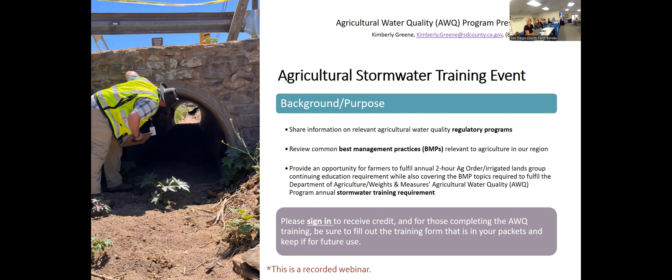Thank you, Jerry. Can you guys hear me? It's like it's on. There it goes. No? Okay. So before we talk about agriculture best management practices to protect water resources, let's go to the next slide. Oh, dear.

So before we talk about agriculture best management practices to protect water resources, I'll go over some of the basic agriculture water quality program scope and purpose. The County Agriculture Water Quality Program is responsible for ensuring that commercial agriculture sites in the unincorporated County of San Diego are implementing best management practices to prevent pollution to our waterways. We require that agriculture operations implement these practices to prevent things like irrigation runoff and other pollutants generated by agriculture activities from entering into downstream county maintained roads, culverts, and storm drains.

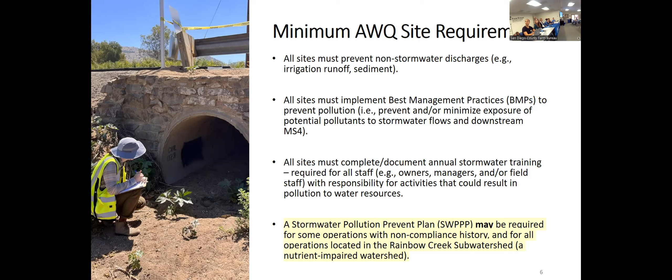As required by the MS4 permit, we follow up on every violation that we observe to ensure that the site obtains compliance. The standard required by the permit is for compliance to be achieved in 30 days or before the next rain event. Sometimes it does take longer for this to be achieved, such as if sites need to implement new or more advanced best management practices. In these cases, we document the rationale for why it's taking longer, and we work with the agriculture operations to ensure that they are provided with technical resources and other assistance to implement the best management practices that they need.

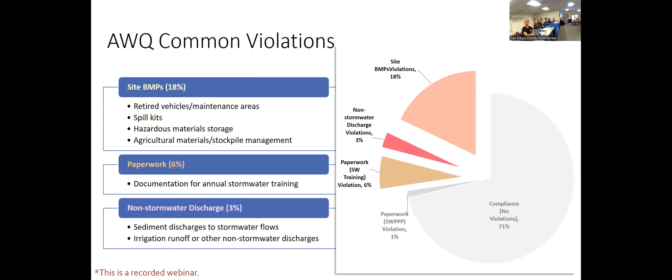For storage of retired vehicles and vehicle maintenance areas, agriculture operations need to ensure these are managed to prevent vehicle and mechanical fluids from being exposed to or mixing with stormwater. This means you'll need to store batteries and waste oil in a way that prevents exposure to stormwater, including preventing contact with rain from above and surface stormwater runoff on the ground. You'll also need to maintain farm vehicles to prevent vehicle fluids from mixing with stormwater.

This means monitoring your vehicles to identify leaks and using catch cans when needed. For retired vehicles, these should be drained or have catch cans. And for vehicle maintenance areas, we need to ensure these are managed to prevent discharge of oils and other potential pollutants to the ground and stormwater.

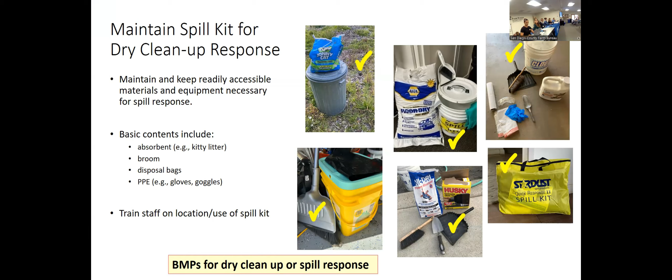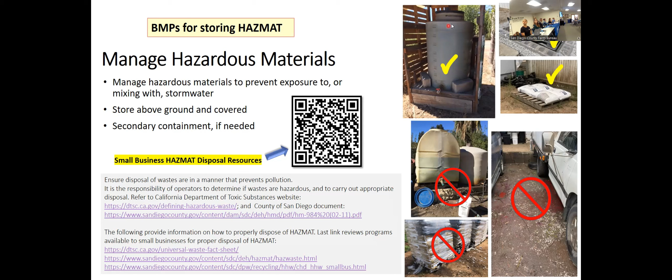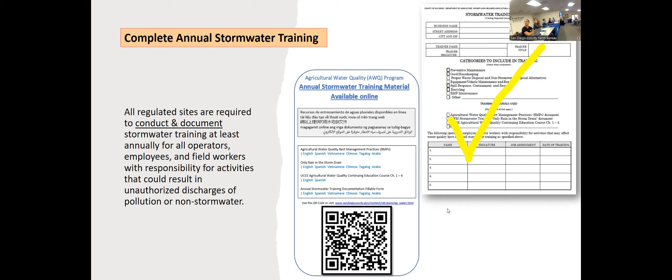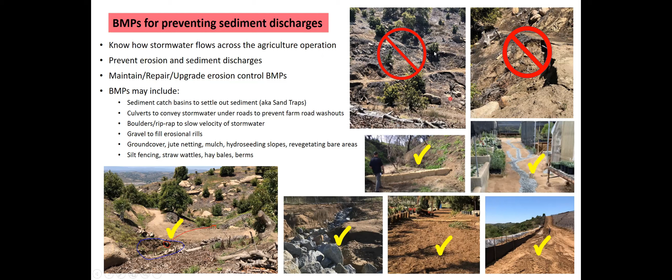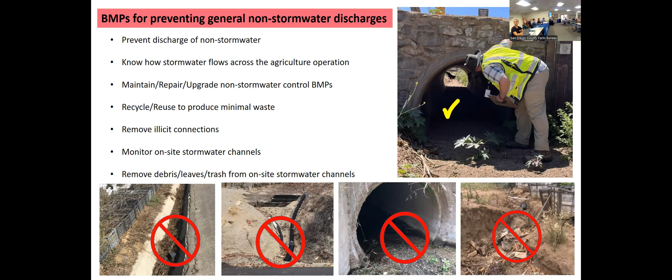Another general best management practice is to effectively use recycled materials on your property, so you have minimal waste that you would then need to manage.

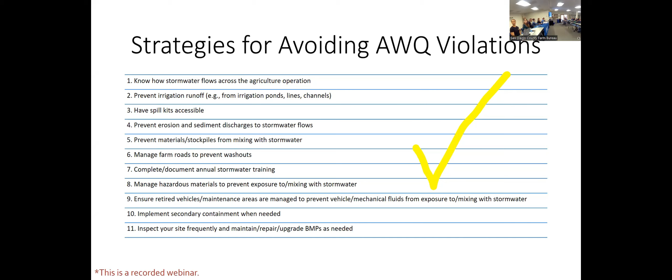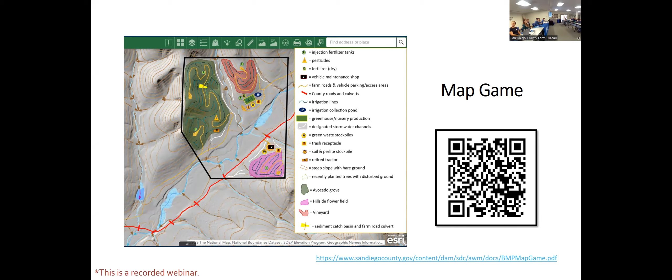Again, the farm roads are gold lines. County roads and culverts are the red lines. The irrigation lines are blue, and there is a greenhouse with a green rectangle. The stormwater channels are the white lines.

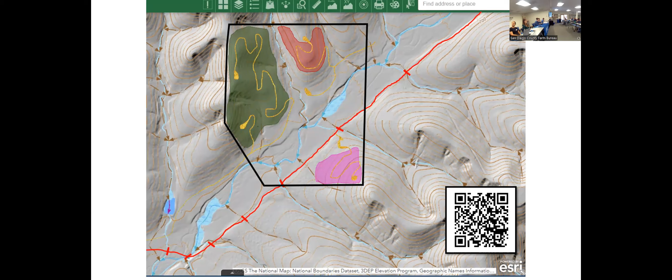The green waste stockpiles are the yellow circles with the W. The trash receptacle is the orange square with a T. Soil and perlite stockpile is the orange star with an S. There's a retired tractor identified with the orange square containing R. There's a steep slope area with bare ground identified with a brown dashed line, and a recently planted tree area with disturbed ground identified with the green dashes.

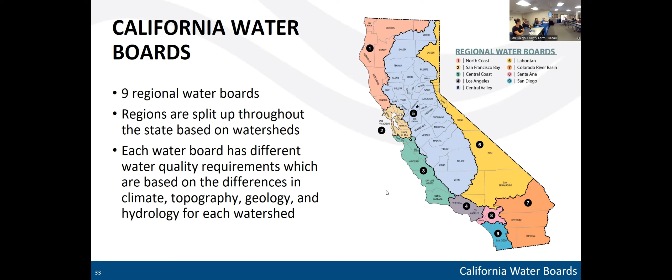Sorry, my slides are not changing right now. We don't know what it is, but something works. So we figured it out.

In our region, we have two agricultural orders right now. Order R9 2016-0004, which is the year the order was adopted, is for growers enrolled under membership of a third-party group. We're currently in the office where the San Diego Region Irrigated Lands Group is located, which is one of our third-party groups. We also have another third-party group, the Upper Santa Margarita Irrigated Lands Group, up in Riverside County.

Our other order is R9 2016-0005, for growers who decide not to join a third-party group and want to enroll as individuals. Currently in our program, we do not have any growers enrolled as individuals—100% of our growers are enrolled through their memberships with third-party groups.

We are currently in the process of renewing our ag orders. We'll be holding a series of public workshops in the future to get direct grower feedback on what you like and don't like about the orders, what you want removed or changed, so we can incorporate that feedback into the revised orders we'll be preparing. The inspection program we have should not be influenced too much by that change, however.

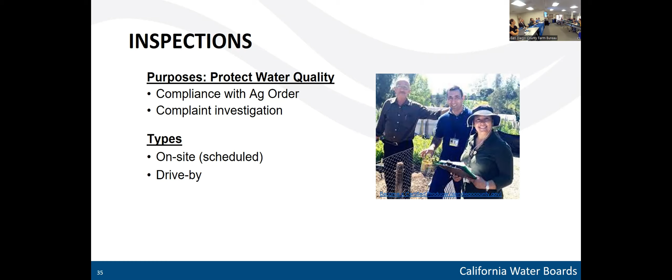One piece of feedback we've received the most is how inconvenient it is for a grower to be inspected by multiple different regulatory agencies for the same problems and situations. As a result, our office has been working hard to coordinate with other regulatory agencies to consolidate our inspections, so we can come out at the same time or very close together, knocking out inspections in one go so you're not interrupted in your day-to-day operations any more than you need to be.

Specifically, we've been working a lot with the County of San Diego's ag department, like how Kimberly put this on today. We've been going out with her and her inspectors very frequently to inspect our sites together. We have a lot of similarities in our programs in terms of what we look for. It's not exactly the same, but there is a lot of overlap. So I think it's very beneficial for everyone for us to go out at the same time and look at these same areas together, and then also look at the areas that are different, because there aren't that many, and get the inspection done at that time, then follow up based on any observations made during that inspection.

As Kimberly said, the County of San Diego's department covers the unincorporated part of the county. So we are also looking into coordinating with city programs that would go and inspect or oversee the sites in the incorporated parts of San Diego. Our program is also not limited to San Diego County. We have some ag sites in Riverside County and some in Orange County as well, so we are looking into coordinating with those counties too, so we can coordinate inspections with them.

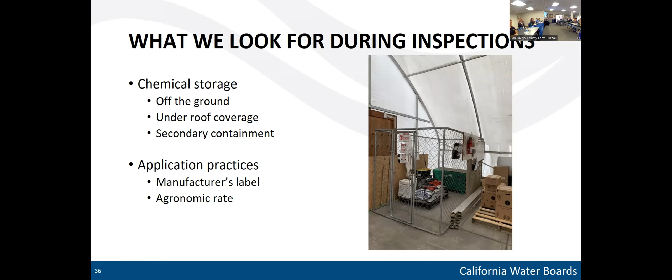Finally, we also check to see that your chemicals are applied properly. We want to make sure the chemicals are being applied according to the manufacturer's label and at the agronomic rate, so that they can't just run off from the field you're applying them to, or infiltrate down into the groundwater, or go into downstream surface water.

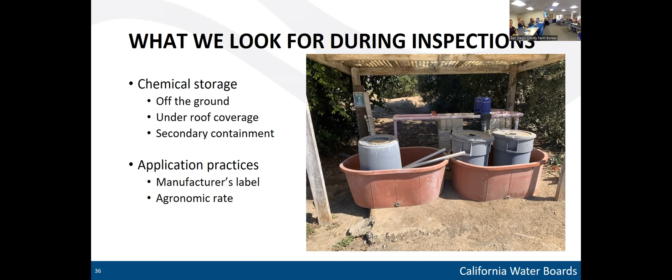Moving on from chemical storage, next I want to talk about irrigation systems. We want to check to see that the irrigation system isn't leaking.

I will ask you about what your management practices are for checking for leaks and how you respond to them, making sure they're addressed as fast as possible, which I know is important for you all because water is expensive. But for us, it's important to make sure the water isn't infiltrating into the groundwater or running off into stormwater, into downstream surface waters. This is especially important if you fertigate your irrigation water, because then that water has all of these nutrients in it that we don't want in our groundwaters and surface waters, since they can be harmful.

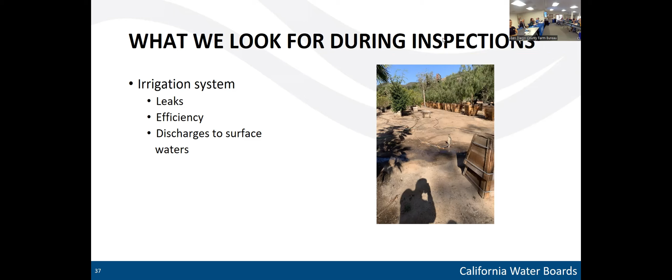We are also concerned about the efficiency of your irrigation system. We want to minimize the amount of runoff generated, to minimize the risk that it can leave your property and go into downstream surface waters or infiltrate into groundwater. So this is a picture of an ag site that has a very inefficient irrigation system and generates a lot of tailwater. As you can see, the irrigation tailwater is flowing on the site.

I do want to emphasize that it is not a violation of our order to have irrigation tailwater flowing on your site. If you are having the water flow to some sort of catchment basin, recycling system, or reservoir, something like that, that's not an issue. We're just concerned about the potential threat of discharge.

So then we would want to see what best management practices you have to minimize that threat as much as possible. Also, as Tim mentioned, we want to make sure that this water isn't mixing with stormwater flowing on your site, because while stormwater is allowed to leave, non-stormwater is not. If non-stormwater leaves your property, it is considered a discharge. So if stormwater mixes with the irrigation tailwater and then flows off your site, that mix is considered a waste, and that discharge is considered a violation.

So we want to make sure there are best management practices in place to keep the stormwater flow and the irrigation tailwater flow separate.

We also check to make sure that the irrigation system is not set up or malfunctioning in a way that causes a direct discharge to surface water.

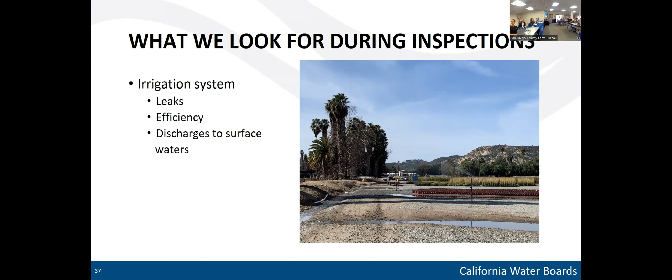Now I'm going to talk about stockpile management. We want to make sure stockpiles are managed so the material cannot easily leave that location and mix with stormwater and be carried away into a surface water body. We want a buffer zone between the stockpiles and any stormwater channels or stormwater flow, and we also want BMPs in place to hold that material there.

You can also use something else to create a berm, like gravel bags or sandbags, whatever works best to achieve the same purpose of allowing water to pass through while leaving the sediment material in place instead of letting it move.

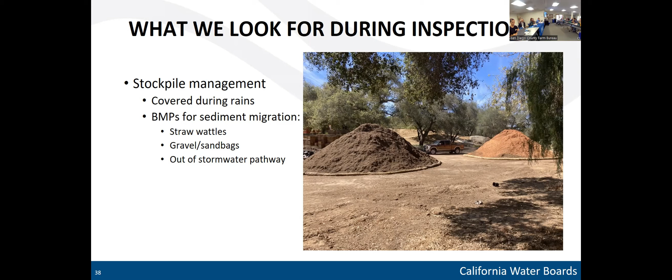As Kim said, another best management practice is to simply locate your stockpiles out of the stormwater pathway. Look around your site, notice where the stormwater flows, and keep your stockpile out of that flow path so the stormwater doesn't flow through it.

We want to make sure you have BMPs in place to prevent this type of erosion, because we don't want stormwater to pick up sediment as it flows over bare dirt on your property and carry that sediment downstream.

Large amounts of sediment in surface water can degrade aquatic life, harming the fish and plants in that stream, and we don't want to see that happen. So we want BMPs in place to prevent erosion.

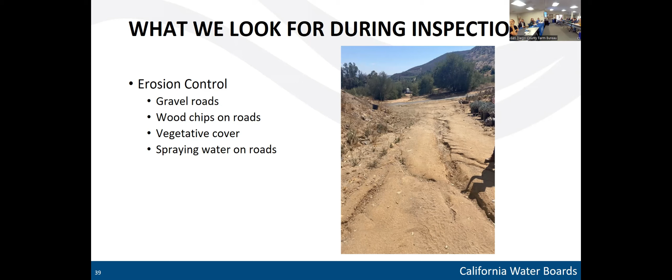This is a picture of a grower who put gravel down over his dirt roads so that as stormwater flows, it doesn't pick up the gravel because it's too heavy. It just flows down without picking up as much material, so there's less sediment to be carried away.

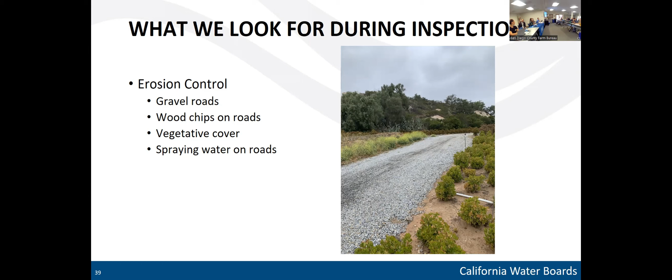If gravel isn't feasible, or paving your roads isn't feasible, you can also use wood chips or something similar to cover the roads. You can use mulch or other vegetative cover, especially on hills, to make sure the soil stays in place and isn't carried away by stormwater.

You can also spray water on the roads, like dust control, to make sure the soil stays there as well.

This ties into my next topic, sedimentation control BMPs. If it's not possible to prevent erosion, you can also put measures in place to catch the sediment before it leaves your property or goes into a storm drain system, like Kimberly was saying earlier.

This is a picture of a grower who puts sandbags around a storm drain to prevent both irrigation tailwater and sediment from flowing through and into the storm drain, which is what we like to see, because we don't want either of those going into the storm drain system.

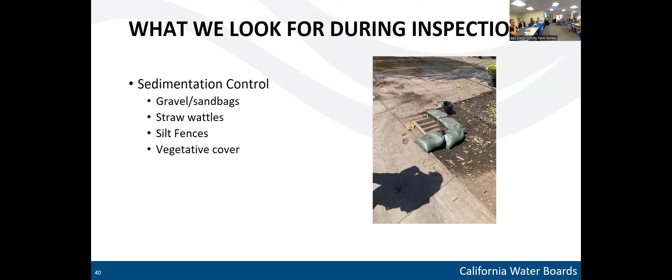You can also use straw wattles for a similar purpose. You stake the wattle into the ground, as shown in this picture, which allows water to flow through but captures the sediment.

In this picture, the pipe is capped during the dry season so no flow can go through, but it's uncapped during storm season so stormwater can flow through to the stormwater system. The straw wattle will still prevent sediment carried by that stormwater from entering the system. You can also put silt fences around the border of your property.

The previous examples were around a specific point, like a storm drain or a pipe.

Ideally, we would like to see both erosion control BMPs and sedimentation control BMPs in place, because that maximizes the effectiveness of the BMPs and ensures that the most sediment possible is either captured on your site or just not moved around at all. It's just staying in place where it should be, and that minimizes the risk of sediment getting into our downstream surface waters and harming aquatic life.

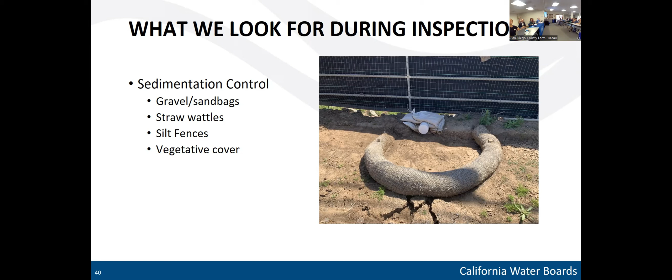We also look at your waste management, so we want to make sure that there isn't trash just littered around the property. It's being picked up and properly stored in a waste container that is lifted up off the ground, has a lid so that it's not in the way of the stormwater flow path, and stormwater is not being introduced and then leaching out of your container and flowing into downstream surface water or infiltrating into groundwater, because we don't want any of the pollutants that may be in that trash getting into our water bodies.

We also want to make sure that trash isn't directly in a stormwater channel, which is the case in this picture. This is some trash that's in a stormwater channel that connects to a creek and discharges directly into it. Our concern here is that when it rains, the stormwater can pick up the trash and anything that's on it and carry it directly to that creek. So we want to make sure this trash is cleaned up and properly disposed of.

When we talk about waste, we also talk about the restroom or bathroom facilities that you have on your operation. Most of the time I see porta potties. I don't really see too many operations that have a different kind of bathroom facility, so I'm going to talk specifically about porta potties.

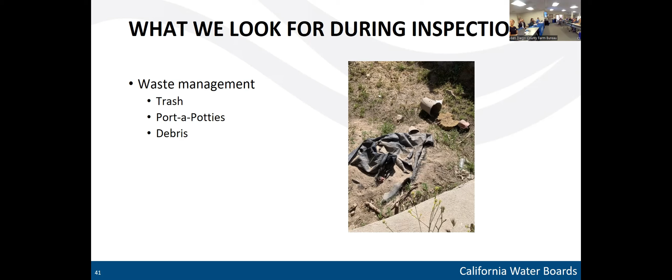We want to make sure that your porta potties have secondary containment, which in this picture is this black tub at the bottom of the porta potties. That way, if there is a leak or a spill or something, the waste in those porta potties goes into this black tub instead of discharging onto the ground and potentially getting into groundwater or flowing with stormwater off into a downstream surface water body.

I also ask during my inspections how often the porta potties are serviced, because I want to make sure that the amount of waste in those porta potties isn't going to overwhelm the secondary containment measure. In that case, the secondary containment is kind of useless if the waste is just going to overflow anyway. So we want to make sure they're being serviced in a timely manner.

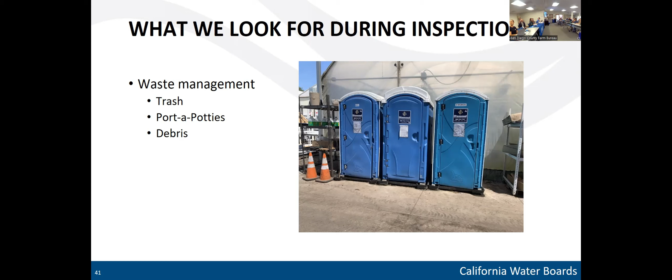We also look at any other kind of debris that may be on your property. This could be drip lines that have torn, or any kind of irrigation line that is torn, or tarps, or just anything else that could be on your property that is waste but maybe doesn't fit in a trash can, or doesn't go to the same kind of landfill that regular trash does. So you're just storing it separately.

It's totally fine to have piles of debris for removal on your property, but we just want to make sure it is organized and out of the way, so that stormwater is not going to flow through it and pick up any of the chemicals that may be on that debris. You want to make sure the debris is going to be removed in a timely manner and not just sit there for a long time. So these are the kinds of things that we look for in waste management.

So I went over some of the big things we look at during inspections. I know some of them were reminiscent of what Kim was talking about, but there's a lot of overlap between our programs. Now that I've covered that, I also want to go over some of the violations I've seen. Since the mission of our water board is to protect the health of our water bodies, the biggest violation is a discharge of waste into the water bodies, because that's directly against our mission.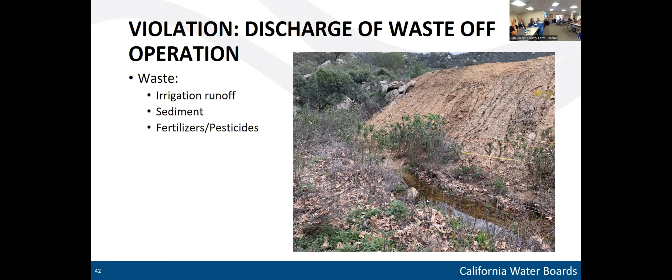Even though this isn't a discharge directly into a water body, our order prohibits discharge of waste off of your operation. So just leaving your operation and going onto another operation is considered a discharge, because it's not the responsibility of the lower operation to manage your waste. Because of that, this waste can flow off their property and get into a downstream surface water, or infiltrate into the groundwater. It's still your waste, so it's still your responsibility, it's your violation.

This irrigation water runoff would contain fertilizers, pesticides, or other chemicals, which is what constitutes a waste.

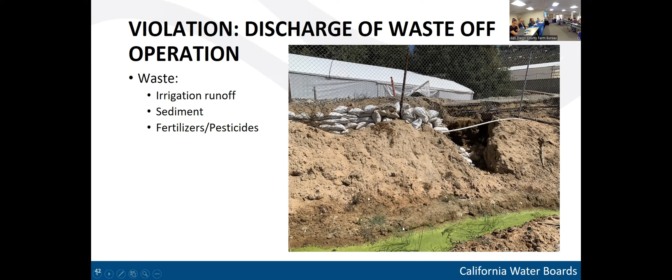Now that I've gone over the violations, I want to talk about what we would do if we went to your site and saw a violation — what enforcement steps we would take and how that process would work.

We always start with voluntary compliance. We want to work with you to make sure we're addressing the problem together. If it's an easy fix, like a leaky irrigation valve, we'd just say, hey, this is a problem, we need to fix it so the irrigation water isn't discharging off your property. Then you'd fix it and send us a picture or email saying it's fixed. Or if it's lack of wattles around a stockpile, you'd send us a picture showing they've been added — something to show you've addressed the concern we raised. So we always start there.

Sometimes, based on what we see, we also issue what's called a staff enforcement letter or a notice of violation. These are two different letters, but legally they're quite similar — a way for us to formally document that we saw a violation on your property. We'd still work with you to address it, to get it cleaned up or stopped, making sure there isn't a discharge of waste off your site. Even though this is a formal enforcement measure that goes on your record, it's not a fine.

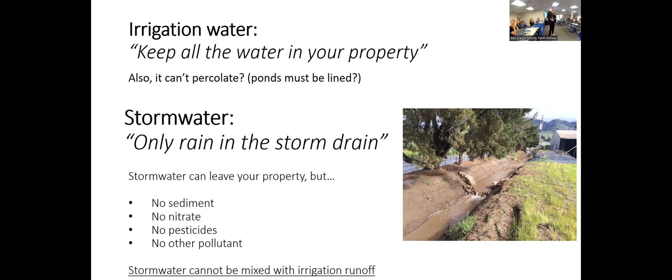But the water cannot have any sediment, nitrate, pesticide, or other pollutants. So the question becomes, how do I avoid the water traveling to my property picking up all that stuff? How do I do it?

Well, you could collect the runoff from your roof, your concrete pad, your parking lot, or any impervious surface. We put a pipe connected directly from the gutter, and NRCS has a practice called underground outlet, but it also has another practice connected to roofs called roof runoff structure.

Maybe, maybe. Where they help you connect to the gutter of your greenhouse or building, your shed or something. So now that water, you don't give it an opportunity anymore to start moving on your property when it can pick up junk. You capture it from there, and hopefully you put it somewhere where it cannot pick up junk anymore.

You can vegetate surfaces. It turns out that if you plant grasses, the infiltration rate is a lot better. But check this out, what they did in this case didn't work - you still get erosion in the middle. They should have seeded it earlier and for more area, and let it establish.

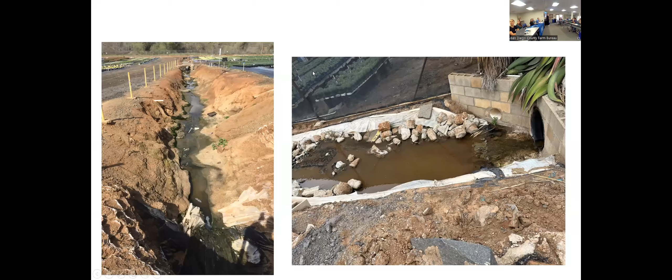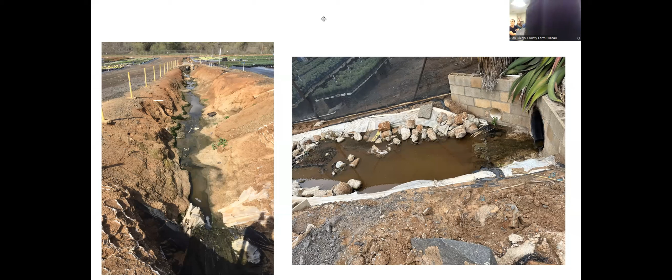What were all these rocks for? What are all the rocks for, Elizabeth? I think they call it riprap. What's riprap for? To slow down the energy of flow, to slow down the flow of water. You see, all these rocks were supposed to be here in front of where the water comes out from the culverts, but now they're not there anymore. Their job is to slow down that water.

How am I doing on time? Check this out, they didn't clean it, that's right.

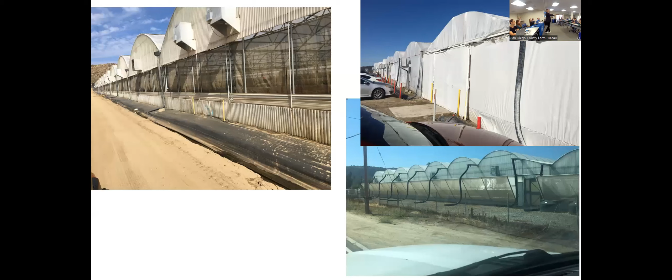Well, the riprap is supposed to stay there - the job of the riprap is just rock. Trash and stuff gets stuck in the riprap. That's the maintenance you have to do, and now it's October, and the weather forecast says that next week we're gonna get an inch of water. So now all hands on deck to be prepared for the rains.

So that's why I stress preparation and prevention. Exactly, and probably add some more.

This is what I mentioned about picking up the water directly from the gutter - here they brought it down, but it goes directly onto a ditch that just has a weed mat. In this case, also weed mat. In this case, they put gravel there, which is a good idea. In this other case, they put a PVC pipe - even better, right? Now the water is in a pipe, so you cannot create erosion anymore.

In this case, they lined the ditch with concrete. They don't have the pipe to bring it down, but they put this foot so the water is supposed to fall there and splashes all over the place. But at least, do we like that, Isabel? Is it a good practice? In some cases, in some cases. I will never get a 100% approval rate.

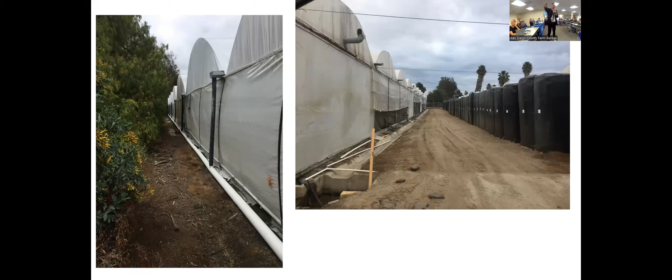What happens here? What's this white stuff? What's this weird stuff here? Who wants to tell me? Nursery people - say it again? Perlite! Perlite! What's the problem with perlite? Say it again? It floats. Now it floats over the water, right? So now it doesn't settle out of solution anymore.

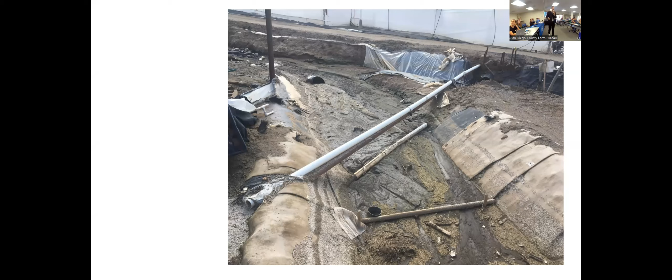So then there are some techniques where you can use backhoes and skim it from the surface of the water. Detention ponds can be lined with pond liners, or they can be non-lined.

How much rain should I expect? How much rain did you get this year? Yes, question about the examples you showed - I didn't see a lot with vegetation. Is there some issue with using vegetation to cover the area?

That's an interesting question about riparian plants. Vegetation is a great idea because it improves the infiltration rate, it slows down the water, it uses nutrients. It uses some of that nitrate that I don't want falling into the creek, it uses that pesticide, and provides surfaces for sediments and pesticides to stick onto so they remain there. For a number of reasons, it has roots that keep the soil together so there's no erosion. What else do you want? It does it all - it's the best thing.

Unfortunately, we don't see it a lot, because it becomes this nasty thing and now it becomes your worst enemy. Now this stuff becomes a weed, it goes all over the place. Now I'm spraying glyphosate to kill that plant that I seeded last month. So sometimes it's a challenge, but it's a great idea.

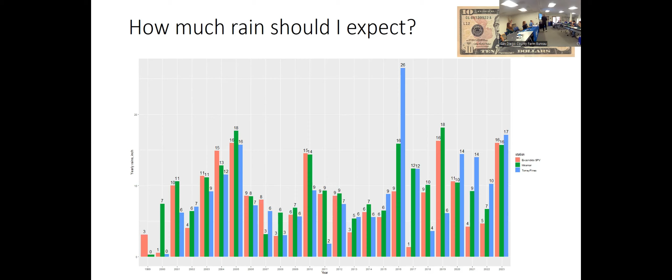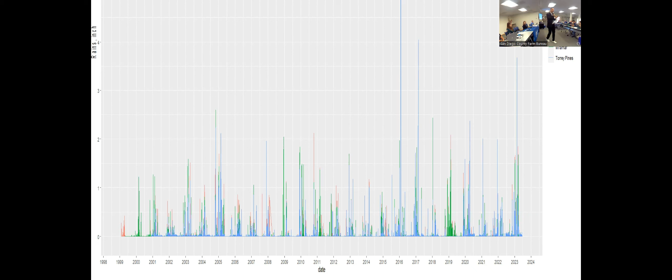But there is one thing you can count on - here I'm plotting the daily data, the daily rains for the same period. The only thing you can count on is that every year you will get at least 1 inch. Even if we don't get a lot of rain overall, you will still have to battle a storm that drops 1 inch of rain, which is a lot. So even in a dry year, you're still going to face that night in the middle of December at 3 a.m. where you get 1 inch of rain that creates a big problem in your nursery.

So why don't we catch it? Could we catch all that rain and put it in a tank? Is there an NRCS practice about that? I think so - put it in a tank. I want to say yes.

Well, next time. So what do we do before the rains come? We clean the ditches, we empty the sediment trap, we put the brick trap back where it belongs. We tell the guy to clean up all his junk. We redirect flows because they don't want us to mix irrigation with stormwater. So when the rains come, we have to go there and close these and open those, redirecting flows so the rain doesn't go into the irrigation system and overflow into the creek - otherwise we get in trouble.

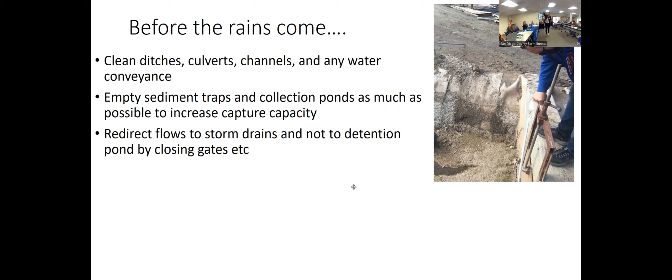Thank you, Isabel. I love it when you approve, when you look with those eyes of approval. I'm running out of time.

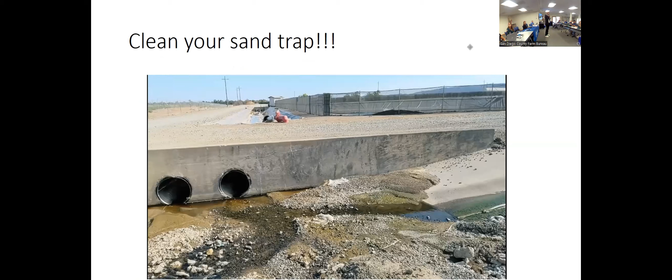My friend Oleg Daugovish up in Ventura did this project where they asked, could we vegetate? Joel was right, we could vegetate with barley, we could use mulch. Dr. King was right, we could use polyacrylamide, we could use fabric. They all work, but it turns out the barley was the cheapest. The problem is that later you have to deal with this barley somehow, then it becomes a weed. But other than that, it's the cheapest solution.

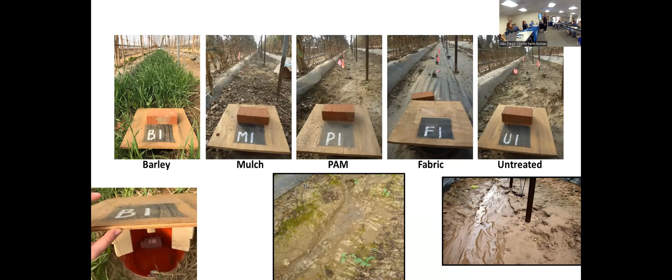Is it cheapest if you factor in the fact that you need to add water to maintain it? Maybe not. That's a good point, you got a real high cost of water here. So then that would make the other practices such as mulch, fabric, or polyacrylamides the best choices.

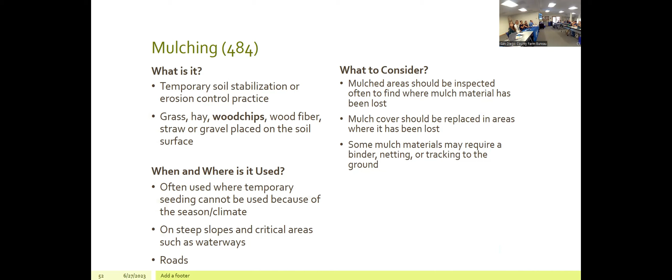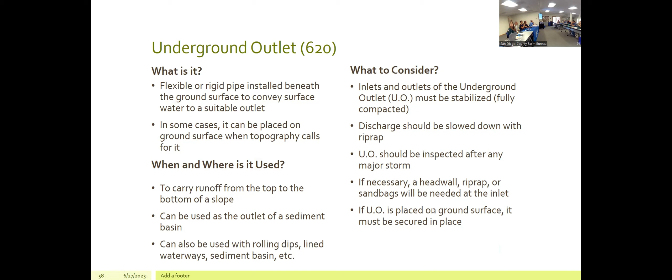I'll show a couple examples of our inlets that we approve of.

So here are some examples. As you can see, these underground outlets are used to mitigate or control erosion happening on your farmland. In this case, the underground outlet is used alongside our rock-lined waterway practice.

It's just a little before and after—you're seeing what's on the right on your farm. Please contact us, we'd love to get out there and help. This will also help control sediment.

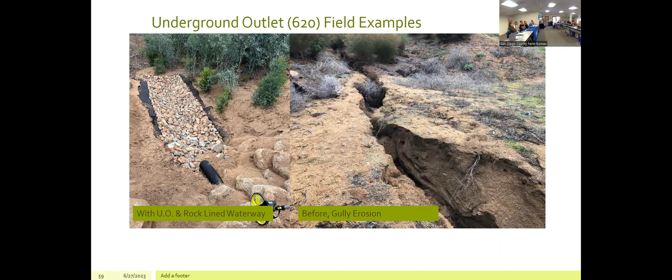Some more examples of what inlets can look like—they could be as fancy as these concrete blocks, or just some riprap with cement.

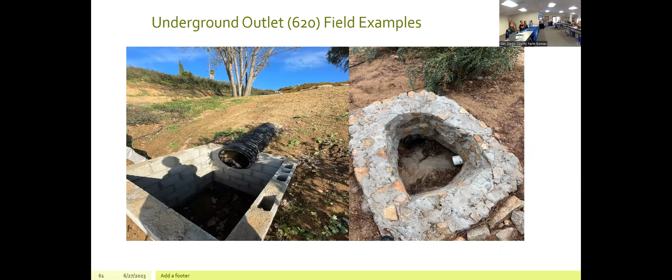This is another example of how our practices can be combined to create a great conservation plan for your property. On the left side, the pipe doesn't come all the way into the inlet box, but they've added rock and concrete to slow down the flow as it goes into the inlet box and continues down the slope.

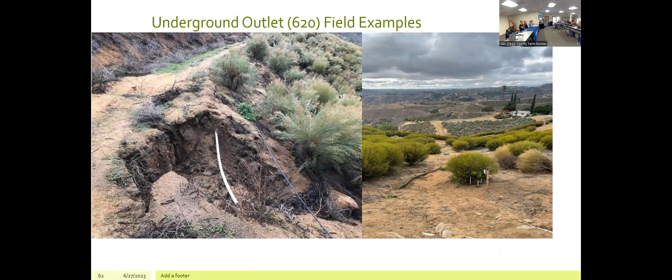On the right side, you can see how our access road practice, code 560, is used to grade the roads so that road water is directed into the inlet boxes and then into the underground outlets.

Here's where sandbags were used to keep sediment out of the inlet boxes, and here's an example of an inlet box.

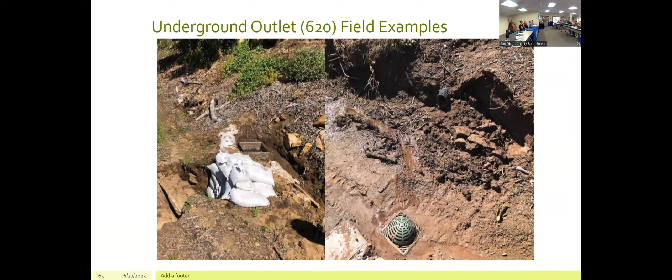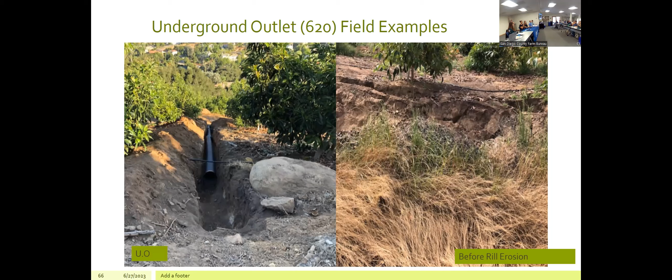Also here, another example of road erosion on the right side, and the underground outlet being put in place to mitigate this.

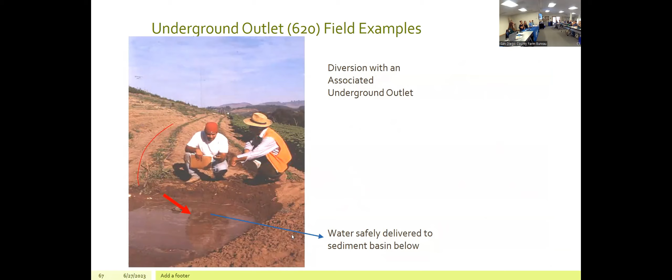And here as well, where you have a diversion just from the way the crop was planted, kind of like on the contour, that diverts your runoff and irrigation runoff into this small catch basin, which then has an inlet for an underground outlet, so that you separate your irrigation runoff from your stormwater.

Okay, and I spoke a little about water and sediment control basins, so that's another practice we offer, our practice code 638.

What it is: an excavated settling pond or earthen embankment placed at the end of a waterway pipe or at the bottom of a slope.

When and where is it used? It's used in conjunction with other conservation practices such as culverts, underground outlets, lined waterways, and other channels.

What to consider when implementing this practice: the basin must be large enough to allow the sediment to settle and should have the capacity to store the collected sediment until it is removed. The basins should be accessible for periodic maintenance and sediment removal.

The volume storage depends on the amount and intensity of expected water, which we now know from Gary's presentation could be from 1 inch to 16 inches here in San Diego.

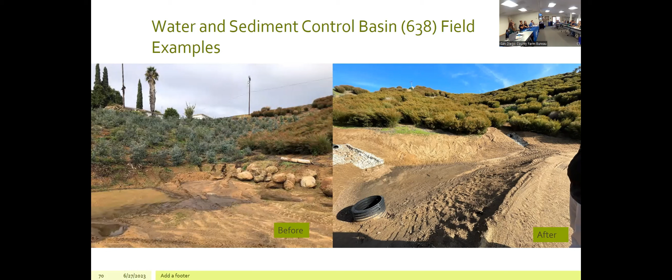Here are other examples of sediment basins. These don't have inlets, they're just capturing runoff coming down the slope. The outlets are culverts, which bring the water across the road so the roads aren't washed off, and sediment gets settled there.

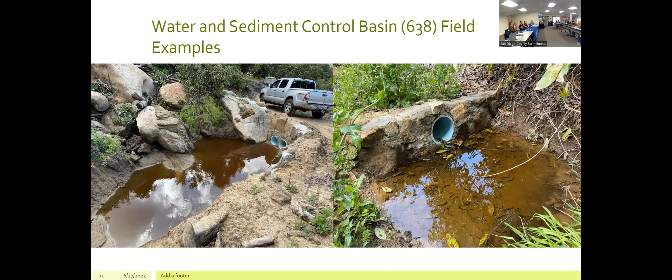Another practice I like to highlight is our stream crossing practice, code 578. This practice is either a bridge or a culvert that crosses a stream or water course to provide controlled access for people, livestock, equipment, or vehicles.

When and where is it used? It is used if water flow cannot cross the access road without causing erosion. A bridge and a culvert can both be used together in this practice.

Considerations: it must include riprap or an apron on the downstream side to dissipate flow energy, and the culverts should be inspected regularly, of course after any major storm event.

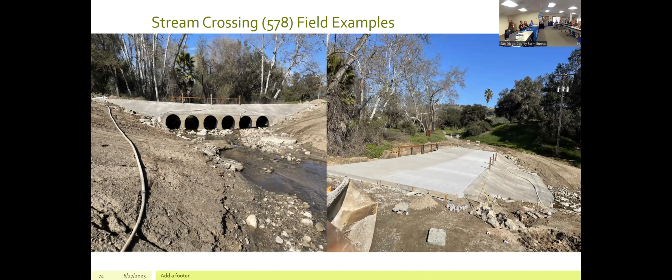So we included these culverts and stream crossing so that the embankment wouldn't keep eroding and the flow could continue on naturally.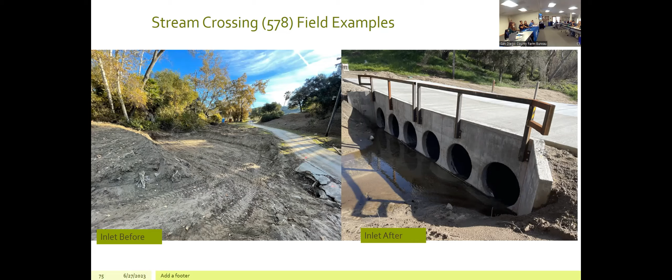This is what the inlet looks like. As you can see, we included riprap at the end to slow down the flow energy. The picture on the left was taken around March, shortly after the big storm event we had earlier this year.

You can see how it worked perfectly. The water is flowing a lot slower, and we have some abatement on both sides, so it's not being washed out.

Another thing to consider with this practice: since we can't really dictate how much flow comes from a storm event, we require signage that says 'do not enter when flooded.' That's just a regulation we have for our practices.

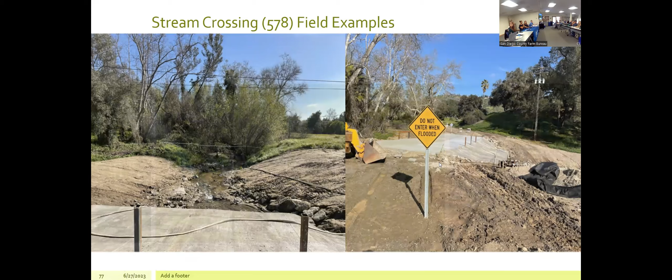The final practice I'll highlight is the lined waterway or outlet practice, code 468. It is a channel or protected outlet section with a lining of either riprap, concrete, synthetic turf, or other permanent material, providing safe conveyance of runoff or other flow concentrations without causing erosion or flooding.

When and where is it used? It could be used to convey runoff from the bottom or top of a slope, and to divert flow into a suitable outlet, which could be a sediment basin or an underground outlet. A sediment basin can either be the inlet or outlet of a waterway.

What to consider when implementing this practice: if using riprap, the lined waterway must have a geotextile fabric lining it underneath, and the waterway should have a positive grade entirely to avoid collection of water.

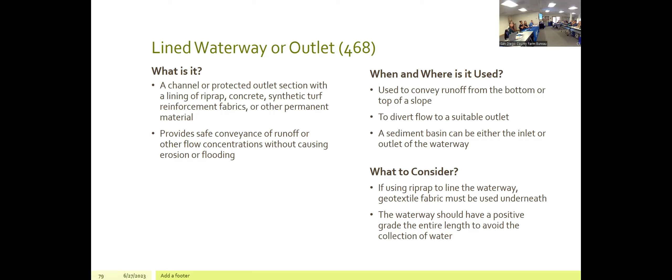Some examples here of just a waterway. In this case, the ground before this was bare, and as you can see on the right side, there's a county culvert that was on the farmer's property. After every storm event, it was getting plugged up with sediment, and he was out of compliance with sediment leaving his property. So we installed this lined waterway to help slow down the water flow and filter out the sediment before it left his property.

Here's another example. This one's pretty long as well. This waterway starts after the outlet of a culvert that crosses this road here.

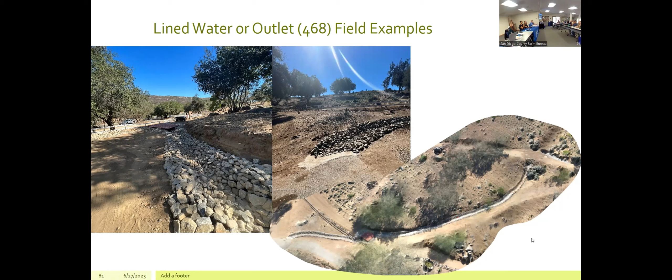Other examples, as said earlier, the waterways could be concrete or rock, which is mostly common here in farmland. In this example, the waterway is working as an energy dissipator after an underground outlet. You can see some sediment buildup here, how it collects it, and of course it has to be cleaned out.

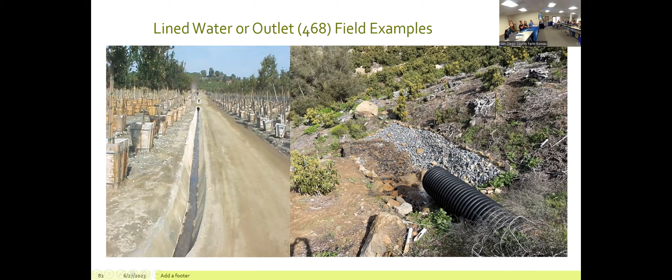And that is all I have for you. I will be here during the Q&A if you guys have any questions.

Hello, everyone. So now something a little bit different. I'm Daniel Desrick, senior agricultural standards inspector with San Diego County Department of Agriculture with Pesticide Regulation. This is Josh Foley. We're both going to be going over some pesticide laws and regs and some updates on things related to that.

Just to get an idea of the room here, how many people here use pesticides as part of their operation or business? Okay, so probably about half of you. Good, hopefully there's going to be something beneficial here for you guys to pick up on. Can you guys all hear me okay? I hope that's right. Okay, cool.

A little overview of what we're going to cover today. We're a little low on time, so we're going to go pretty quick and try to truncate this. We'll go over some licensing changes, general personal protective equipment requirement updates, since those are always the most important thing to remind people of, and then quickly review some storage of pesticides and disposal processes.

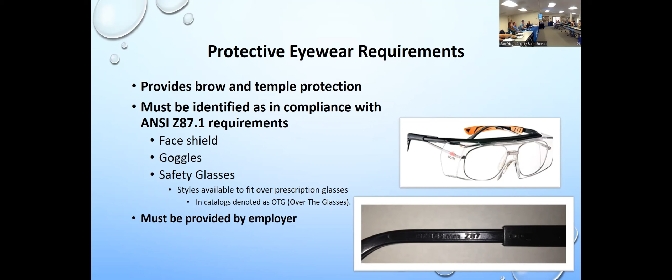Okay, glove requirements. If product labeling requires a specific barrier or identifies a specific category, it must be at least 14 mils thick. If the product labeling requires chemical resistant gloves, they must be at least 14 mils thick, unless barrier laminate or polyethylene gloves are used.

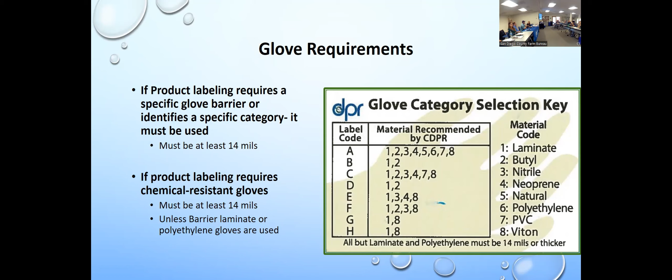And if you're confused about any of this, you can feel free to give us a call. We have an inspector on duty Monday through Friday, so we're always here answering questions. And here's those trash bag gloves I was talking about earlier.

So gloves required by the label. Here's a Minx label, and this one says long sleeve shirt and long pants, chemical resistant gloves made out of a barrier laminate or butyl rubber. So yeah, it's important to read the label first, because sometimes applicators will be wearing those green nitrile gloves, but they didn't read the label and they actually need either barrier laminate or butyl rubber. So make sure you read the label.

Glove liner requirements: tasks requiring a high level of manual activity can be used, like adjusting nozzles and such. Chemical resistant gloves less than 14 mils thick can be used, but only for 15 minutes, and then they must be discarded after each use. Flock gloves or those with other types of non-separable liners are prohibited.

Okay, label required respiratory use. Labels are now requiring a respirator when they did not in the past. We're seeing more organic products coming out, organic herbicides, and there are respiratory requirements for some of those products because of the irritation to the lungs. So it's important to make sure that you are reading the label.

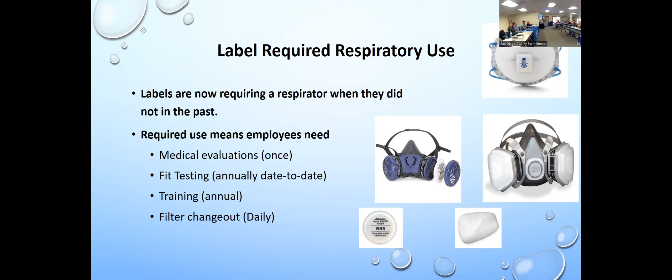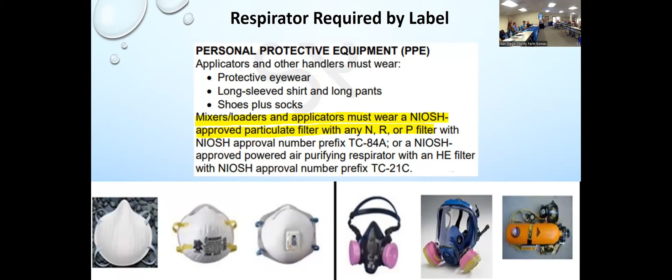Now, storage of PPE. The employer shall provide all required PPE and clean or replace any worn, damaged, or heavily contaminated PPE in storage. Making sure everything is clean is super important. PPE is kept separate from personal clothing to prevent cross-contamination. Measures are taken to prevent heat-related illnesses, which ties into reading the PPE requirements - on a hot day, what is legal for them to wear so they don't get heat stroke. Discard heavily contaminated materials, wash PPE separate from other clothing, and dry before storing. Assure PPE stays on the property and handlers do not take it home.

Now, storage of pesticides. A permit needs to be available for any restricted materials being stored. Any person who controls the property where pesticides are stored is responsible for securing the container. No food is allowed to be stored with pesticides.

You can't have your sandwich in there right next to whatever you have stored.

The storage area needs to be posted with warning or danger signs. Registrant labeling needs to be on all containers that hold or have held pesticides. All lids and tops must be securely fastened. A service container label is needed for transporting pesticides in secondary containers down public roads to other sites. Empty containers need to be properly rinsed. It's also important to store material with the potential to contaminate runoff in a manner that prevents contact with stormwater flows. We got a lot of rain, so if there was a big flood through the storage facility, having containers elevated could prevent those issues.

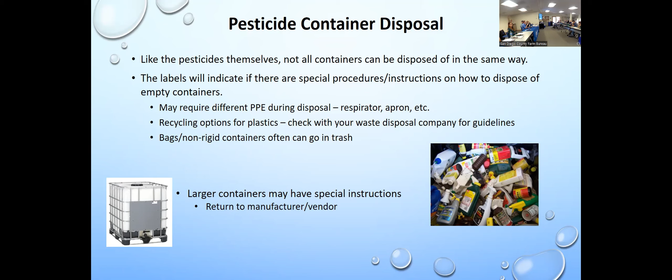So when disposing, there is an actual process you need to follow. You've probably heard of triple rinsing before, but make sure that you actually triple rinse in an appropriate manner.

The other thing I do want to highlight is make sure that when you are disposing of these products and doing your triple rinsing, plan it ahead of time. As you're filling your pesticides up and using it, you want to be able to use that rinsing. You can't just have the rinsing and dump it down the drain. You want to basically, while mixing up your final load, integrate it back into the spray you're using, so you can actually utilize the rinsing you're acquiring from your disposal process and not dump it down the drain or get stuck with it.

So essentially it's 3 times. The other thing is a lot of people think puncturing the container is required by law. It is not. The regulation is 3 CCR section 6684 - the triple rinsing is all that's required. Perhaps some products say don't use again, they may have functional requirements on each individual label, but that's not by regulation. However, it's still a very good idea to puncture it or do something to make sure that container is no longer useful.

Even we've run into incidents where people have found spare containers and thought, oh, I can use this for something else, and they do, and then you've got a contamination issue.

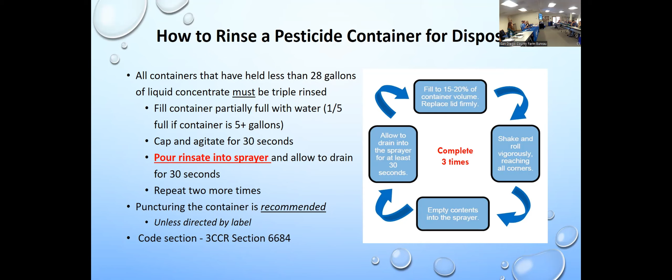If you have a bunch of containers you need to recycle and your current waste disposal system isn't easy to use, we do offer recycling about every quarter. We have events where you can come down to San Marcos, drop off all your recyclable pesticides, and we will collect them for you. There's some brief information, and we also have flyers on the table if you want to refer to any of those.

The other thing we're going to cover is disposal of pesticides. This is a question we get a lot from people with old bottles of stuff - maybe no longer used, or banned, or they purchased a property with a storage shed full of bottles and don't know what to do with it. Obviously you can't throw it away, you can't dump it down the drain, and especially if you don't know what it is, you can't use it.

You have to dispose of it through an appropriate manner. This means you either have to go through a professional service of some sort. Some of those are oftentimes quite expensive. Fortunately for the county, we actually had a couple of disposal events this year where we were able to collect a bunch of old unused pesticides from growers and dispose of it for them at no charge, which was a great service. Glad we were able to do that.